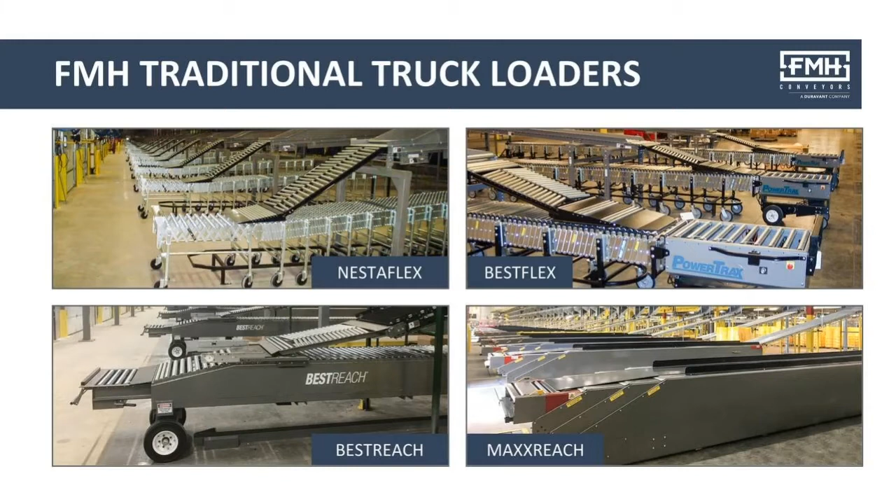When you look at the AfterSort two-stage trailer loader, also known as a TL2, this is not new to the industry. In fact, FMH Conveyors has successfully deployed thousands of these in the field. The exciting part now is that AfterSort is under the FMH Conveyors umbrella, which gives you and your customer another option.

The price of the AfterSort system falls between the gravity Nestaflex and the powered BestFlex, somewhere between $24,000 to $26,000. If you have a customer that wants a gravity system, maybe has used gravity BestFlex or Nestaflex over the years and insists on using gravity conveyor, while also loading the trailer with pallets, the AfterSort could be a solution for you.

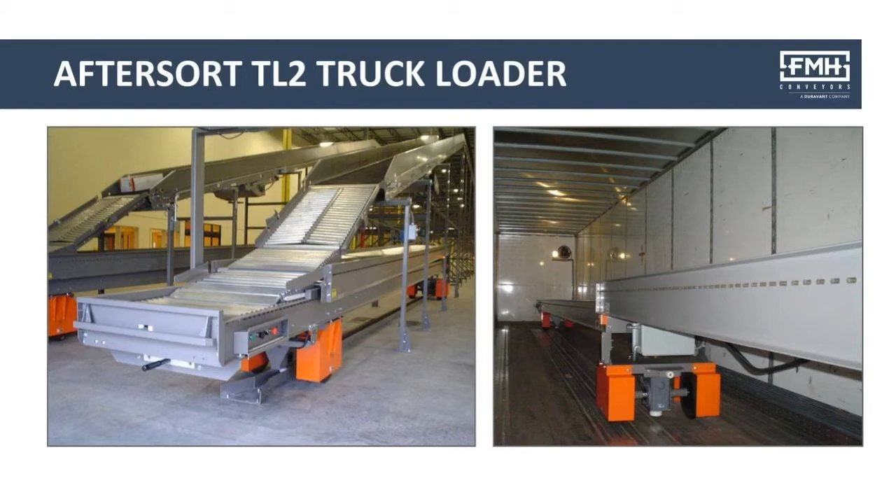From a design standpoint, the benefit of the AfterSort is that, unlike the gravity Nestaflex or BestFlex, it doesn't have the scissor mechanism or side link mechanism that opens and closes. If you've got the Nestaflex extended into the trailer and you take a pallet jack with a pallet, or even a forklift, in and out, you're inadvertently going to damage that flexible conveyor. Unlike the flexible conveyor, this AfterSort two-stage loader has a robust design that can withstand impacts from lift trucks.

It starts out with a 10-inch structural channel. The operator controls at the discharge end are recessed and protected. So basically, you can have this unit extended into the trailer, and as you're driving a forklift into the truck, you can bump the edge of this unit and rub it all the way down into the nose of the trailer without hurting the unit.

This AfterSort two-stage truck loader also has integral guardrails, which reduces potential product damage. What we mean by that is that the rollers are set low in the frame, so basically you have side rails all the way down the system.

The two-stage loader also, unlike the gravity Nestaflex or powered BestFlex where you have to manually push and pull the unit in, is equipped with a powered drive system. From an ergonomic standpoint, the operator just has to push a button to extend and retract the conveyor into the building or the trailer. This unit does require 480 volt power, so it's powered in and out, but it's a gravity conveying surface.

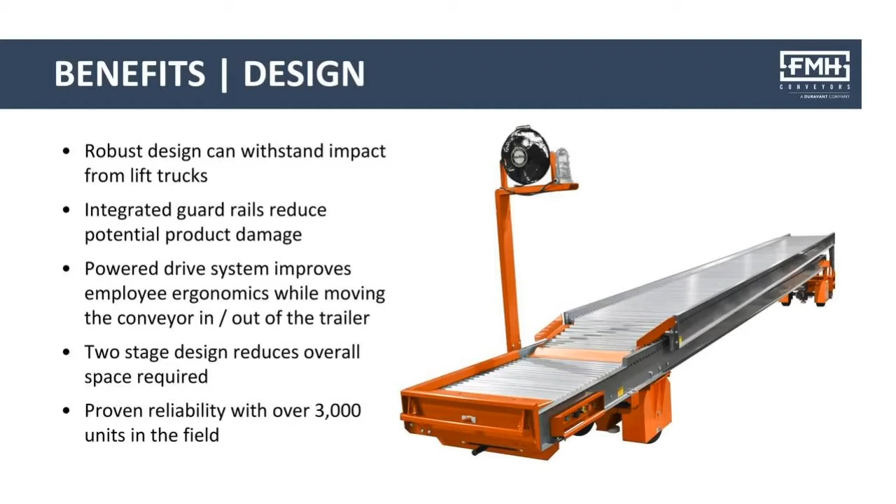When you look at the first onset of a project and you're trying to determine the number of doors that the customer has, we believe the AfterSort offers a very low initial investment cost up front. Again, it falls between the Nestaflex and the BestFlex trailer loader. We also believe it offers the lowest lifetime cost of ownership.

With proper maintenance, we believe this unit will last over 20 years. It offers very low maintenance cost over the life of the unit, with very few moving parts. Basically, on this machine, you have a drive, and then you have the operator controls up front.

The rest of it is mechanical. We have seen this particular machine in operation, where it reduces load times and increases productivity by providing a steady flow of cartons down to the operator inside the trailer. You can force feed the product to the operator. Unlike a powered belted conveyor, where the operator gets tired and can turn the belt off, with this unit, as long as product's present, they have to unload it.

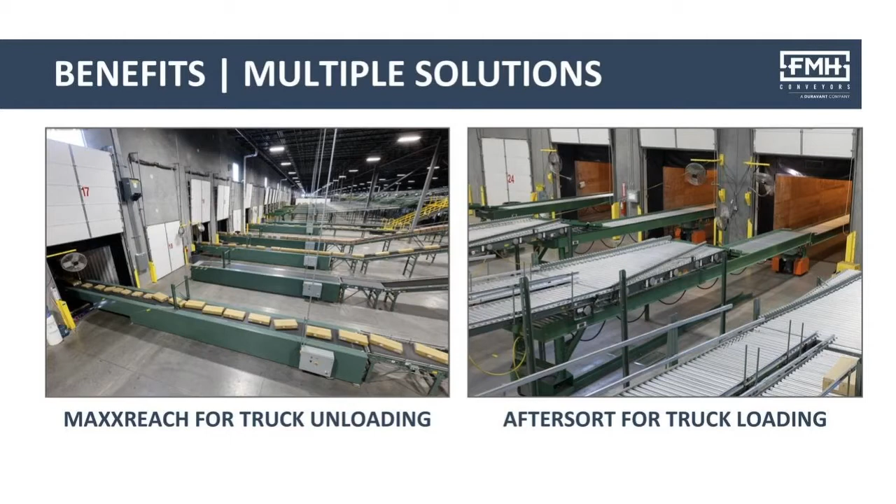The applications and market segments where you're going to find the AfterSort two-stage loaders are really no different than the rest of our product line: e-commerce, the parcel post industry, 3PL companies, food distribution, and retail distribution centers.

Now, looking at the AfterSort two-stage loader from a unit standpoint, I want to go over the features with you. This is a two-piece telescoping design. This lower stage will drive out into the trailer first, and once it drives out, the back end will catch, and then the entire unit will pull into the trailer. So the entire unit extends in and out of the trailer.

It's powered in at 45 feet per minute. The decline needs 60 inches of clear space - we'll talk more about this under design considerations. You can see the herringbone transition here that we're providing. This is the feed conveyor that you would provide. Underneath there, we need 60 inches clear to the floor for this machine to operate.

I'll explain on the next slide some of the reasons why we need the 60 inches clear. The in-feed elevation of this two-stage loader is 54 inches to the top of the roller. The discharge, where the operator unloads the product, is at 26 inches. We use a 1.9 diameter roller, 16 gauge, with lightly oiled bearings as a standard. The standard arrangement is 3-inch axle centers.

We like to follow industry standard rules of having three rollers underneath each carton. This particular unit has a safety bumper bar with auto reverse on the front - just to make sure everybody knows where I'm talking. Basically, if I'm extending the unit into the trailer and bump into something or someone, it stops the forward motion and backs the unit up.

The other benefit this offers: if I'm loading a trailer, all I have to do is use my hip to bump into that bar and it automatically backs up about 12 inches and then stops. This unit is also equipped with a manual steering arm on the front, giving you steering up to 3 degrees in either direction, left or right.

I talked a little bit about the recess controls - they're located on the discharge end of this machine. Typically you have a belt start, power on, power off, a reverse, and an e-stop. You might have a switch for a decline to control the front, or maybe even a light or fan that we'll talk about.

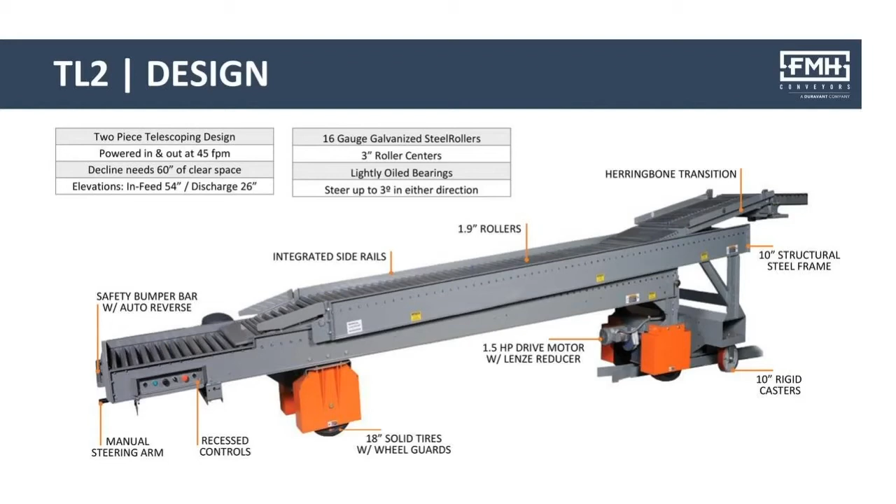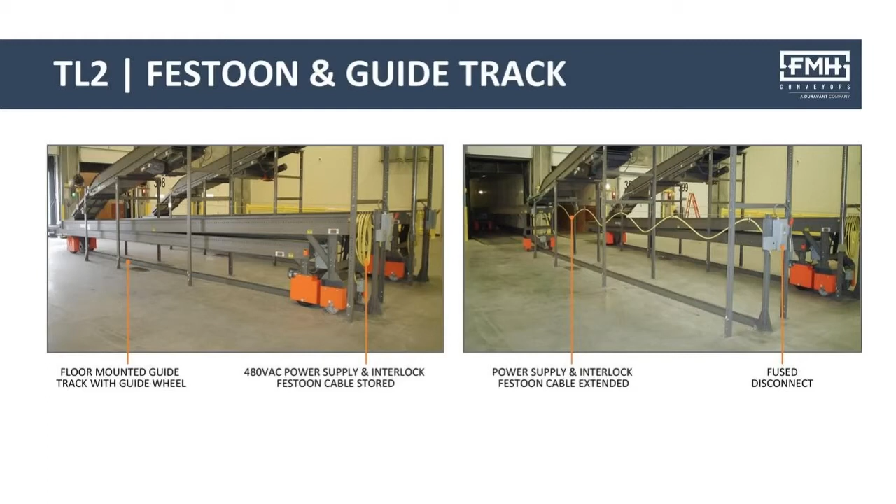Looking at the operator controls, you have an option to put them on either the left-hand side or the right-hand side of the conveyor. This is important when you get ready to order this conveyor - the factory is going to ask which side of the conveyor you want the controls on. So it's a little bit tricky.

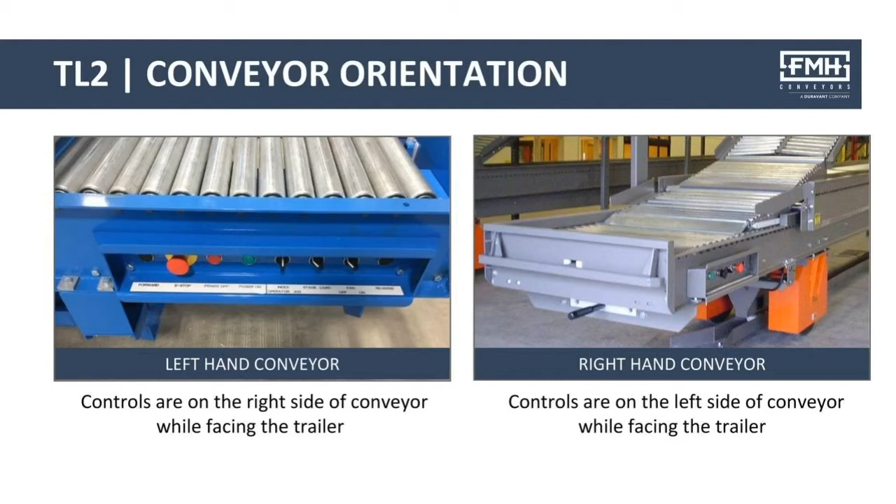It's kind of important to know when you do your layouts - what we've seen is if you've got 30 dock doors, you may have 15 that are left hand and 15 that are right hand, because most people will put the truck loaders on the inside of each door, so you maximize your aisleway in between the downlines. That's what we've seen most common.

Some of the features that come with the AfterSort two-stage loaders is obviously the herringbone transition. We call it an optional feature, but out of thousands we've sold, we've never sold one without the transition, and I'd encourage you guys not to try to do this yourself. This transition is unique because it pivots here at this area, and then it hinges at this area. It also has integral guardrails built in, and we can offset those - they could be 3 inches tall, 4 inches tall, or whatever height we need to fit the application.

With this unit, you can also put a light or fan kit mounted over top. You can also change the roller centers from a 3-inch center to a 2-inch axle center - so if you had a customer with a 6-inch carton, you'd want to go with a 2-inch center. We also offer an option to change the oiled bearings in the rollers to an ABEC bearing.

There's a word of caution here though. If a customer's concerned about noise - let's say you had 50 dock doors and all these trailer loaders are going with lightly oiled bearings, you're going to hear a little noise, and you guys are probably familiar with that. So if they're concerned about noise level, the ABEC bearings are the way to go. But the caution is the ABEC bearing does not roll as freely as a roller with oiled bearings.

We also have an option with 230 volt 3-phase power for you, and then of course the fuse disconnect, and the operator controls. That operator controls can control a pop-up stop on a decline, a gravity decline, or we can have a belt stop button to control a belt decline.

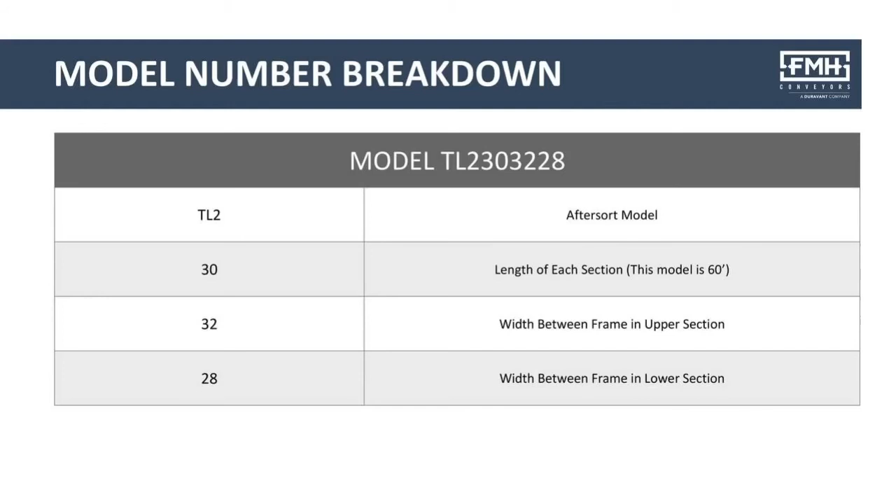Hopefully that makes sense to you guys. From a design standpoint, when you're doing your layouts and trying to figure out the best application for this product, the first thing you're going to want to look at with any conveyor system is the products to be conveyed.

If you have a customer nowadays, especially e-commerce, trying to convey poly bags, this is not the conveyor for you. This conveyor is for cartons and maybe even totes, unless they're putting the poly bags inside a tote, which most people are using belted conveyor for. We're using our telescopics or rigid drive-outs to convey it into the trailer.

You're also going to want to find out from your customer what size trailers they're loading. We mentioned 48, a 53-foot trailer, maybe even a pup trailer, to try to find out which model, which length of conveyor we need to specify.

You'll also want to know if they're going to be palletizing, using any palletized loads. Are they going to have any non-conveyables that they want to load into the trailer at the same time that they're floor loading? That will determine the alignment of the conveyor to the door.

You're going to want to know what type of dock leveler is being used. Because this unit has wheels and drives in and out of the trailer, you're going to want a good dock plate, whether it be a portable or an in-ground dock. You want something there to cover the gap between the warehouse and the trailer.

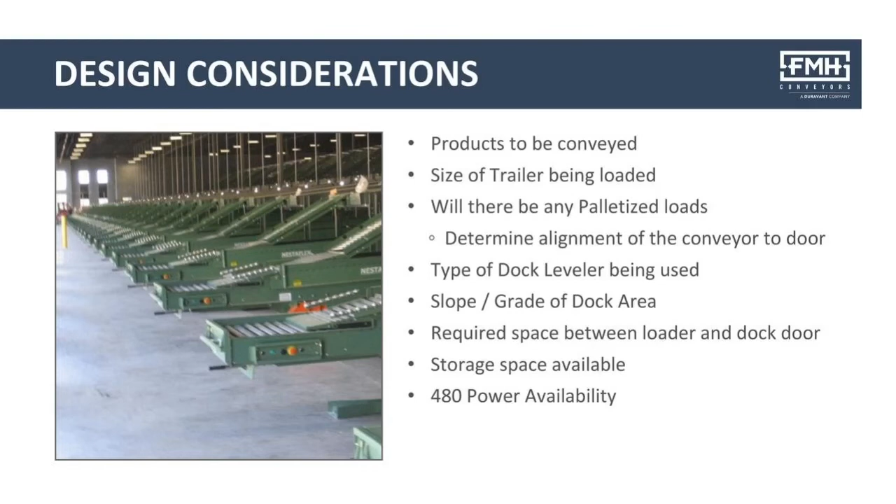Use the drawing board again. When you engage FMH conveyors and you're supplying the feed conveyor, we can help you determine where to put your conveyor in relationship to the door, and we can help you determine what elevation it should be. We also can help you determine how wide these supports need to be in order to accommodate the trailer loader. All that basically is just a matter of us having a conversation with you about the application and how the product's going to be fed onto the loader.

You don't have to worry about the track. Basically, this unit comes as a package, and that's where our engineering comes into play. We will help determine what the length of that herringbone transition needs to be based on what's feeding us. So that's just an added service we offer to our customers, to help you with layout when you get ready to do your layout.

One of the things I like to point out is anytime you're using a belt decline — this is no trick, you guys are definitely familiar with this — since the truck loader has integral guardrails with rollers set low in the frame, you can accumulate. Most of our customers that use this unit may have 30 dock doors and one operator loading 2 or 3 trailers, so they're floating back and forth from the dock door. So if I'm at dock door number 1 and dock door number 3 has got a lot of volume coming down it, this unit will allow you to accumulate back.

The cartons will accumulate back up on the unit, and typically what we have is a full line photo eye right here. Once the cartons back up to this photo eye, it blocks the photo eye. At that point, you have 2 options. One is you can shut down this belt automatically, no matter what is on it and where it's located.

In my opinion, what I like to use is a run-up photo eye, which is right here. Basically, what that does is allow, if the trailer loader is full, it still lets you divert and fill up the decline before you shut the sorter off and go into resort. In my view, that helps maximize — it minimizes the air and the gaps on the conveyor, and it helps maximize the throughput rates on the loaders.

That's just a little trick. I don't know if you guys are used to seeing that. It's pretty common — I just want to make sure you're up to speed on that.

Okay, so basically the way this operates is the trailer loader itself is just gravity. It's got rollers set low, so you can see the shafts of the rollers here. I've got about 3 inches of channel acting as a side rail. So as product comes down the decline across the transition and hits this trailer loader, the trailer loader is extended into the trailer, so the product is going to accumulate and back up. If nobody's inside that door and the sorter keeps diverting cartons, the product's going to go all the way down to the nose of the trailer and start backing up.

Once it backs up to a certain point, that's when you're going to block this photo eye here. Once you block that photo eye, that's when the decision is to be made to shut down this belt, no matter where the product is located on it. You've got a choice: if you shut it down instantaneously, it's going to shut down and could have 30 feet of empty space. Or if you let the full line photo eye trigger this run-up photo eye, this belt can continue to run until the leading edge of the carton blocks it.

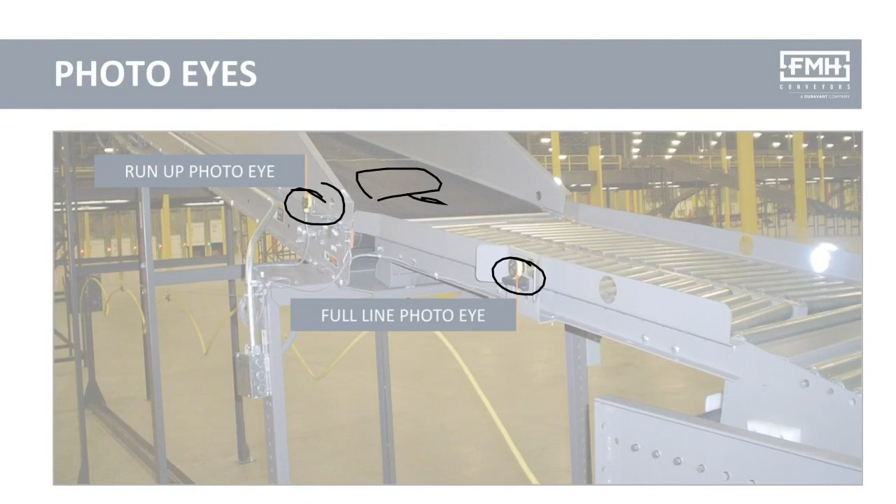What that means is that some customers will have a line of accumulation. They'll come off the sorter with a section of accumulation and then go down to a belt decline. This belt decline could be full of product, and there's probably another photo eye upstream that will start the accumulation to go into accumulation mode. That's all we're trying to do: maximize the throughput, minimize the air and the space on the conveyor. Hopefully that makes sense to you guys.

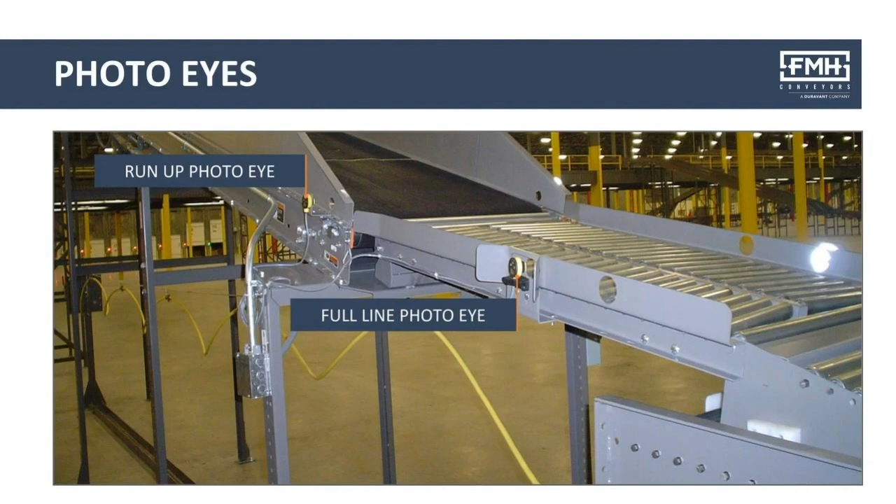Let's see here. Go back to the questions here. All right, looks like there's a question from Mike about whether FMH is selling these direct to end users, or will they be giving us leads to use these.

There is a handful of national accounts that use this equipment that we sell to, but the majority of these have been sold through integrators such as yourself. We will be providing leads as they come in to each associate, to the channel. They'll be funneled out to the channel partners in the regions, and I'll show you a map of the regions here in just a second.

Okay, there was a question about what is the pitch or angle of the decline on the two sections, and does it change with the length of the system. It really doesn't change. The in-feed height is always 54 inches and the discharge is 26. So what you may be thinking is, if I've got a 60-foot unit or a 64-foot unit, it's not going to gravity flow very freely. You're exactly right. This unit, because it has the integral guardrails, relies a lot on line pressure. It takes a pretty good sized carton to go all the way to the nose of the trailer, depending on the slope of the trailer and the grade of the dock outside. So if you've got really light cartons and a lot of them, you may want to think about using an up-belted conveyor instead of the two-stage, because it does rely on line pressure.